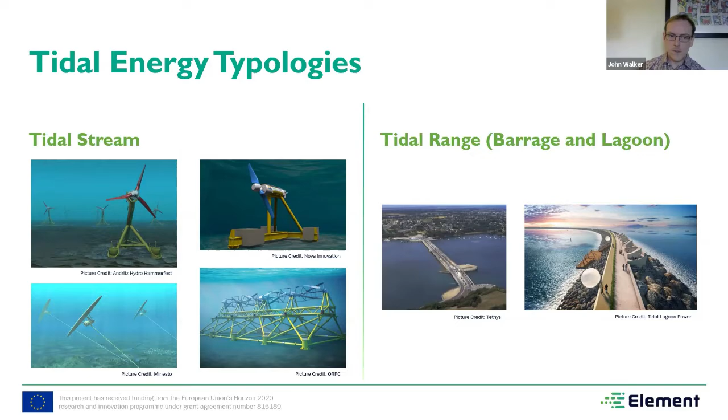Okay, so technology readiness. So the technology is now crossing a boundary from demonstration projects into commercial tidal arrays. In the last decade or so, there's been significant progress with notable advances in the technology. Devices are now being deployed into the harsh marine environment with a good degree of confidence in their expected performance, and with the benefit of sustained periods of operation at sea, both in terms of the data and the information that's being collected, operations and maintenance understanding, and also proving that they can survive this environment. And the technology has now also been proven to be able to deliver consistently into the grid.

Industry pioneers have successfully funded and deployed first arrays such as the Nova Innovation Bluemull Sound Array in Shetland, the world's first fully operational grid-connected tidal array, which we'll be hearing more about this afternoon, and also the MeyGen project in the Pentland Firth, the world's largest tidal array at the moment. And we've also seen production milestones such as Orbital Marine Power's 2 megawatt device, the world's most powerful tidal turbine.

To continue this exceptional progress, we need to continue increasing performance and reducing costs, and this is where the Element project comes in, making use of advanced control methods. The UK and Europe are well placed at the forefront of the technology development, with a variety of active developers, a strong supply chain, and unrivaled test centres and demonstration zones.

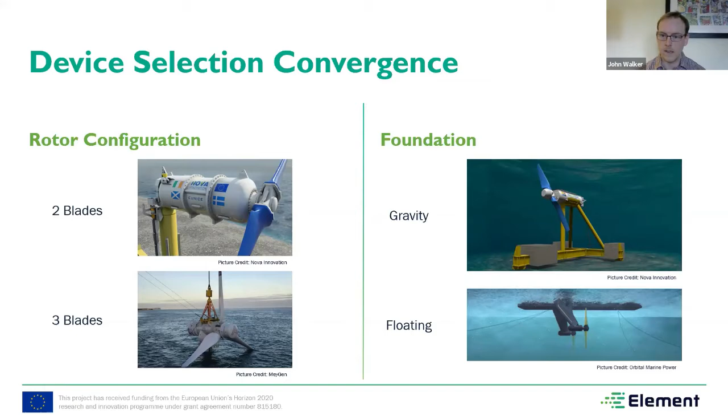And just to complete this introduction section, ORE Catapult and Nova Innovation have been successfully collaborating as project partners for a number of years now, particularly on the EnFAIT, which is Enabling Future Arrays in Tidal project, D2T2 project, and now Element. We've covered quite a wide range of work with them, which covers project communications and dissemination, marine offshore operations, and then also looking at the Shetland array resource and wake modelling, which required ADCP and ADV deployments, turbine load monitoring and instrumentation. And as part of the D2T2 project, we've previously tested a turbine at our facility in Blyth.

Okay, and that's a good point to hand over to Colin Walker, who will now describe the role of the Shetland tidal array in the project.

Thanks, John. Yes, I'll just share a quick introduction to Nova Innovation and where we're at in our technology development to help provide a context for the role that Element has for us as a company. We have our head office and manufacturing facility here in Edinburgh in Scotland, but we also have colleagues spread out in Shetland, Wales, and most recently Canada.

We just celebrated our 10th birthday as a company last month, and in those years we have been continuously developing our tidal turbine technology. We started with a 30 kilowatt prototype device and then designed, built and deployed 3 of our 100 kilowatt M100 devices in what became the world's first offshore tidal array at our Bluemull Sound site in Shetland.

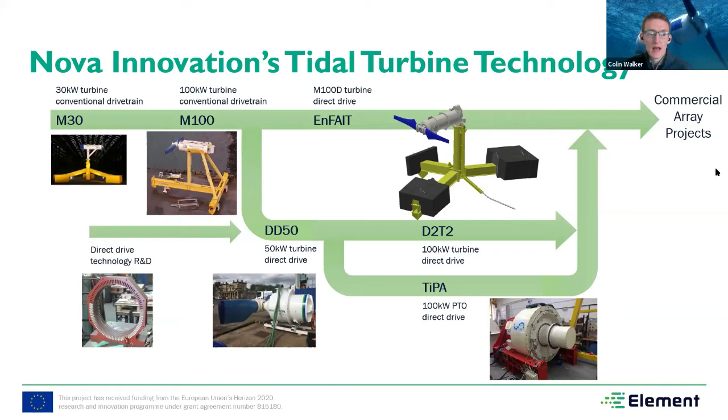As well as the technology within the turbine itself, we've developed other aspects of technology associated with tidal energy for ultimately delivering renewable energy to the grid. One such project was our energy storage project in partnership with Tesla, where despite the variable power production from the tides, we are now able to provide a constant base load delivery of power to the Shetland grid from our turbines using battery storage and our in-house developed automated power dispatch controller.

So we're not just developing the turbine hardware itself, but at Nova we have a holistic approach to making tidal power a practicable and competitive option for renewable electricity production. For example, we've also got a live project developing right now, an improved subsea electrical connector for marine renewable energy devices. So all these different aspects come together with the turbine itself.

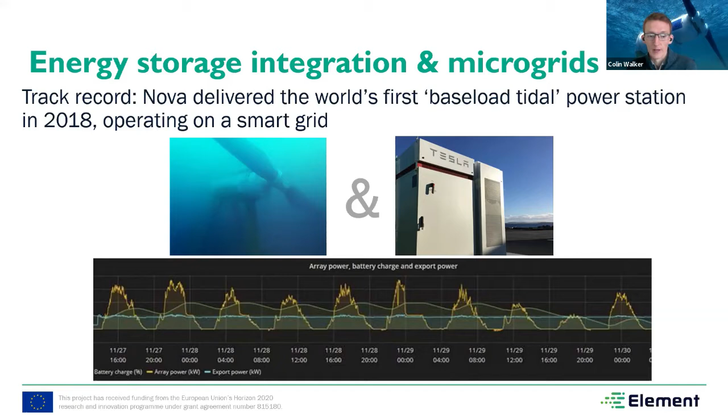Next slide, please. Having said that, the turbine itself has always remained the central focus for our technological advancements. And ultimately, this is what makes the money. It must be demonstrated to perform reliably and survive the harsh marine conditions of high flow energetic sites.

There should be a few pictures of that, Audrey. I'm not sure if it's going to be on another click.

But after learning many lessons, yeah, thanks, from these, the 3 projects represented on the screen there, we believe that our current hardware design is capable of what we require from it. It's in a good place and it's been matured over several years. We've also been developing the turbine control system in each of these projects, but Element gives us a unique opportunity to advance the maturity of our control system at a faster rate.

Taking the progress that we've made in our hardware development, we can now make advancements in our control systems to ultimately get more out of what we already have. And I'll talk more about that later and how Element does that for us. Okay, I'll now pass over to Dr. Hong Yue.

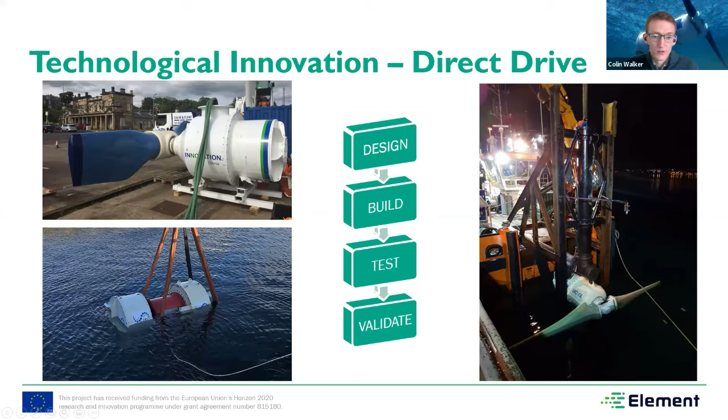Thank you, Colin. I'm Hong from the University of Strathclyde. As I mentioned earlier, we are involved in the Element project, mainly looking after behavior modeling. Strathclyde University has been awarded University of the Year twice, and also this year we've been awarded Scottish University of the Year and the Queen's Anniversary Prize.

For this project, mainly 2 departments are involved. We have colleagues from the Department of Electronic and Electrical Engineering, that's EEE. And we also have colleagues from the Department of Naval Architecture, Ocean and Marine Engineering, NAOME in short. So these 2 teams together bring the UK's largest cluster of researchers in offshore renewable energy. Next slide, please.

So first, I start to introduce my research center, the Wind Energy and Control Center in the EEE department. This is a research group focusing on renewable energy and also control. So we do teaching and research in various fields, mostly in wind, but also in other renewable types. For example, the dynamic analysis of turbine systems, modeling, simulation, control system design and optimizations, etc. And also we look at resource assessment, condition monitoring, etc. And there are other areas like a wider covering of complex and nonlinear systems.

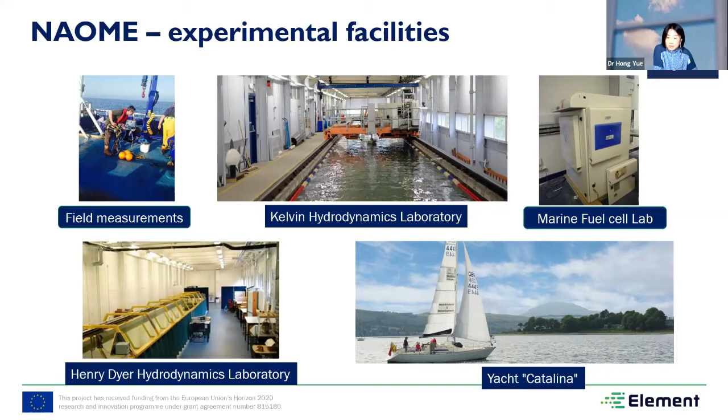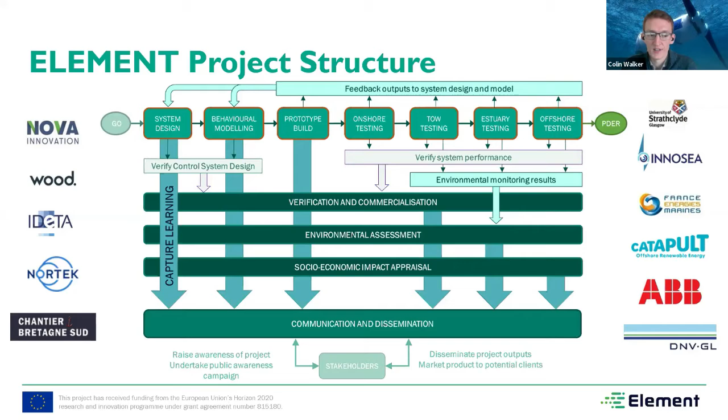You go to the next slide, please. I think you might need to click again. My PowerPoint skills let me down there.

One of the main unique aspects of Element is the fact that we aren't having to invest significant capital to make improvements in the control system. So at the moment, most of our turbine cost is associated with the turbine structure, the drivetrain components, etc. Basically all of the hardware that we have to put in the sea. But once we've developed a control system, there isn't much marginal cost involved for changing one control system out for another. And that's because these changes are predominantly software based.

Maybe sometimes we'll require some new sensors or minor hardware changes, but most of the changes are in the software, and as a result don't bring with them an additional capex cost, and therefore our existing turbine design remains at the same cost even with these improvements added in.

The other unique aspect of the project is that we aren't starting from scratch in this area of control system improvement. The wind industry has been here long before us and to a lot of extent continues still to work in this area, but the Element project is looking to bring the experience that our project partners have from that industry, and also bring the knowledge over from wind industry control to tidal turbine control.

Ultimately, the principles and concepts of control are common between the two applications. But where Element adds value is that by transferring these learnings from the wind industry and then tailoring them to meet the nuances that tidal presents, we can make the most of those learnings that wind has already made before us. Go to the next slide, please.

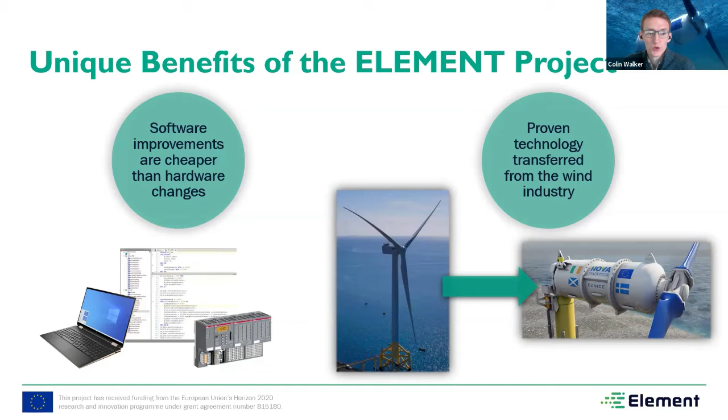So what do we mean when we mention the turbine control system? Well, it is quite a broad term, but basically it covers anything within the turbine that's involved in controlling operation of the turbine. If you focus in a little bit to the fundamental operation of a turbine, it's to deliver power to onshore by controlling aspects such as the speed and torque and power of the turbine. And this fundamental aspect of controlling the speed and torque and power, we call the turbine controller. And it's particularly complex, and it's a specific area of focus for the Element project.

All of this decision making has to happen constantly and at a very fast rate. If you think of traditional thermal power stations, you've got the opportunity to throttle or control the fuel, whether it be coal or gas or whatever, or even in hydropower, controlling the water flow. You have control of that into your system. And so when you want to power down, you can throttle that fuel supply back. But like wind, in tide, when we're working with nature, we don't get to control what we're presented with, and we can't control the tidal flow.

So this effectively means that the turbine is flying blind. It doesn't know what's going to come up next. And so therefore it has to constantly be reacting to the power produced by the turbine rotor as it spins. To put it another way, between the time of me clicking my fingers, our turbine in Shetland will have calculated and changed the speed and torque of our turbines over 20 times between each click. And so what is a very fast decision requires very accurate information and intelligence to make the right decision. And so this is where the complexity arrives.

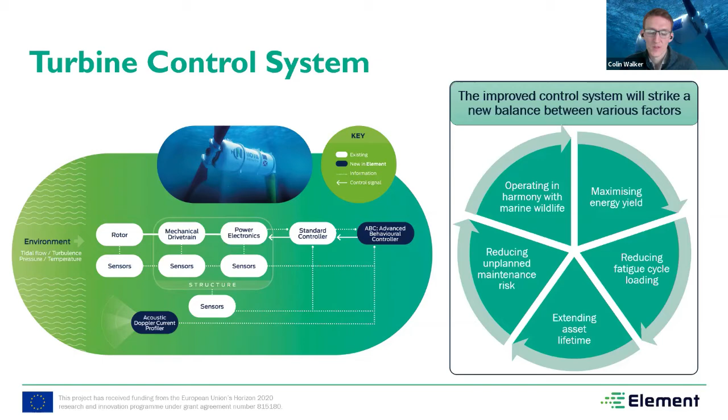That just outlines some of the tangible objectives for the project. These are specific targets within the project that ultimately all result in a reduced levelized cost of energy. That's the main measuring rod, if you haven't heard that term before, for where the industry and technology are at.

That LCOE reduction that we're aiming for, that 17% reduction, is made up by a modest improvement in energy yield, that's electricity produced, a reduction in OPEX through improved reliability, particularly around the area of reducing variations in loads that the turbine experiences, and therefore reducing fatigue loading of the turbine structural components, which also contributes to a lifetime extension, where we also want to increase the lifetime of the turbine by improved management of the turbine as it ages.

In other words, the same way as you drive a 15-year-old car a bit differently from a brand new car, it's that kind of approach that we're wanting to build into our control system. And ultimately that can produce a reduction in LCOE.

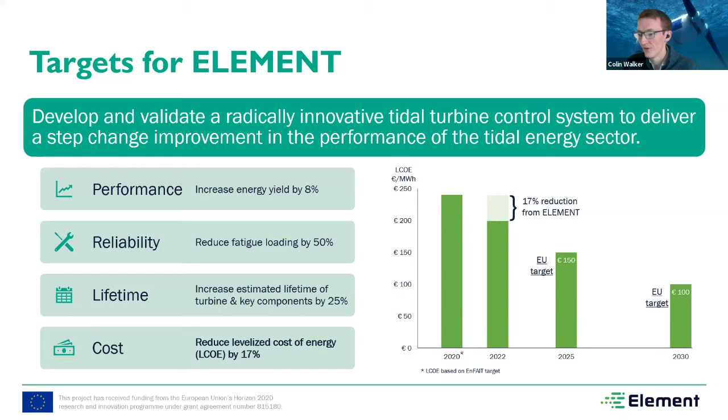Colin has mentioned the control challenges for the tidal turbine systems. And as you can see, there are various factors to be considered for the turbine system. And then how do we balance all these important factors in the same system? One option is to establish a holistic numerical model that includes the different subsystems into the system.

And we are hoping that such a behavior model can be used to test and tune the control systems over a wide range, covering the different turbine sizes and the different supporting systems to the turbine system. And also we wish to see the performance in different testing sites, say onshore testing, tow testing, estuary testing, offshore testing, etc.

And then I need to echo Colin and John that the tidal turbine system operates in a very harsh and also uncertain environment. So if we hope to improve the control system performance for such a system under a highly uncertain environment, we need to take into account data information. And the data information can come from new measurement technologies and also from new estimation techniques.

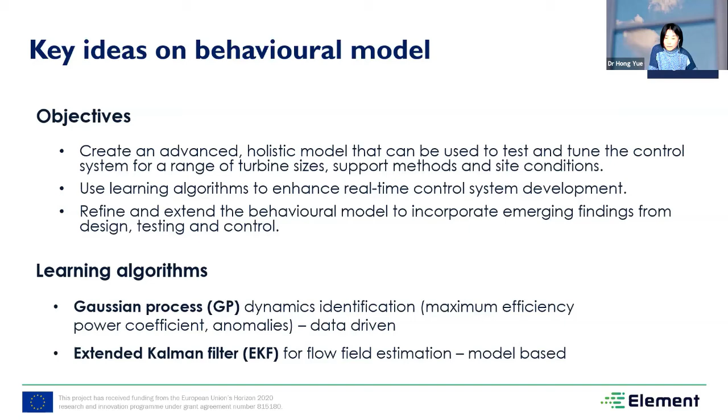Okay, right. This is a configuration of the behavior model system. I'm putting here a very simplified version, mainly to give you a flavor of what is included in this behavior modeling system. So if you look at this configuration figure, in the central part of the system, those dark blue blocks are developed in the first stage, as we call initial behavior modeling. And in the very central part of this modeling system is the turbine model itself.

And the turbine model takes input from the far-field hydrodynamics part, and also, in the first stage, a simplified structure supporting model. And this information can provide the simulated measurement data that can be used for the controller design. And the controller, of course, will give guidance or instructions to the turbine system for the operation.

And then for this system, the core turbine model can produce output that is used for calculation of the energy generation, and also to evaluate the loading performance to be used for the damage model.

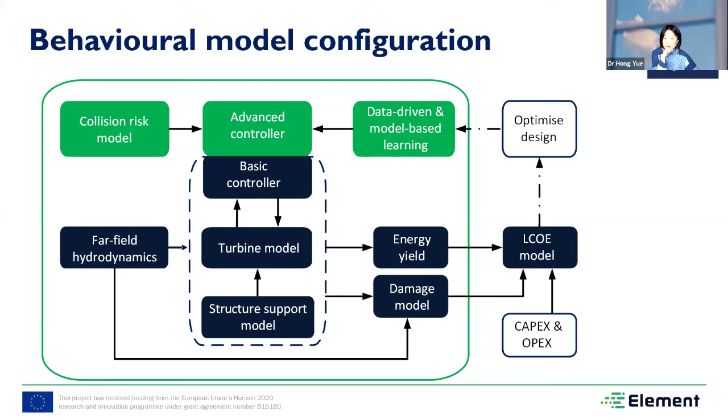For the Element project, we have different work packages for control and also for behavior modeling. They are closely linked together, and the control target itself, we can put the control at different levels. For example, at the supervisory control level, and also at the operational control level. I just put one recent slide here to show a part of the supervisory control.

And in this case, for the tidal turbine system, if we look at the start and stop operation at the supervisory level, a reasonable logic is to put it into several stages, including 2 startup stages, 2 shutdown stages, and 2 park stages at high and low flow speed, and 1 shared normal stage

in between. To design a proper control logic to support the startup and stop of the tidal turbine system, in principle, we need to estimate the flow and make decisions based on reliable estimation of the flow information. And these can be supported by various techniques.

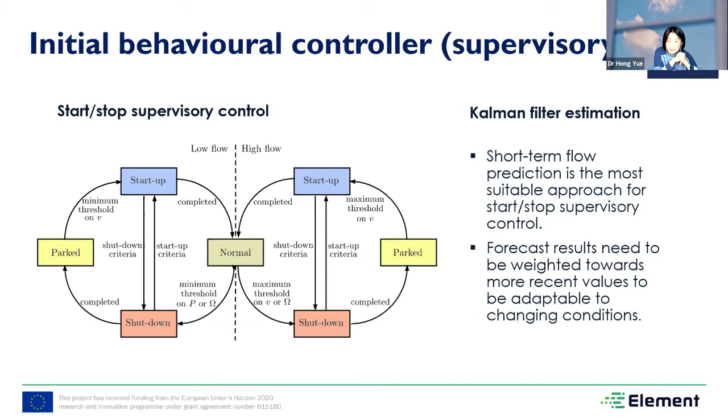One of them, which is highly regarded in the wind industry, is to use a Kalman filter to estimate the flow information in the short term. So that is going to be investigated in this project. Yeah, thanks, Hong.

So ORE Catapult will be delivering the onshore testing work package at our test facilities in Blyth, and this is scheduled for April and May 2021, so next year. So the key benefits of including the onshore testing in the programme are being able to perform a performance appraisal under very controllable test conditions. This helps to de-risk the future offshore operations in the following work packages.

And you can imagine it's a lot easier to address any issues and findings onshore than once you've deployed offshore. Also with testing, you've got the ability to cover a very wide test matrix, and you can control the point of your test, like Colin alluded to earlier. Tidal flows are very variable. During your testing onshore, you get out what you put into your test rig.

And that will give the opportunity to adjust or optimize the test controller before going on into work packages 9, 10 and onwards. The test results from the onshore testing will be independently verified prior to that, and the findings will be invaluable for informing that future work.

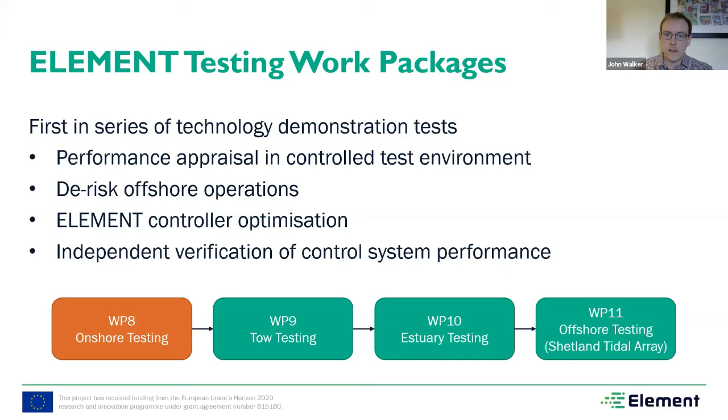Okay, so just a very quick background to our test capability at ORE Catapult. So we operate the most comprehensive, open access and independent test and research facility anywhere in the world for offshore renewables. And we use our expertise to help develop the next generation of these technologies.

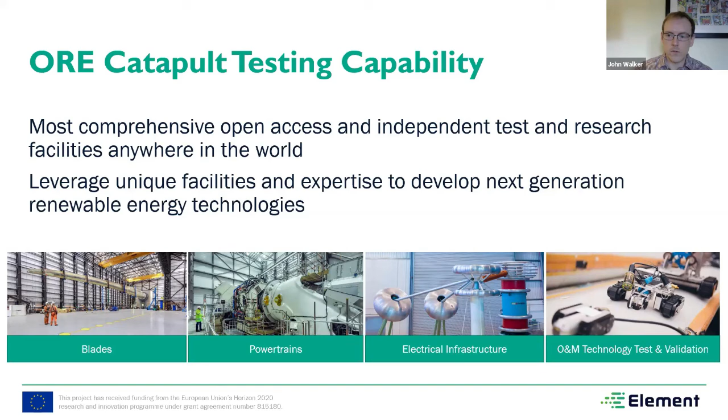And these test and validation activities fall under 4 key areas. So blades, powertrains, electrical infrastructure, and operations and maintenance technology test and validation. So the area that we'll be looking at for Element is powertrain testing.

So the 1 MW Powertrain Test Rig is being developed to test and support the development of sub-megawatt, so below 1 MW, systems and sub-components. And these tests typically include endurance and extreme load, system performance tests, and system verification and validation, and also improvements to the physical and numerical models, such as condition monitoring validation.

Got a full suite of instrumentation, including torque and speed measurements, which are used for the controller feedback, and everything's output through to a 50 Hz 400 volt distribution board. And obviously it's all controlled by SCADA systems. That's for the data acquisition and the control, and that all includes the essential safety protocols for the test.

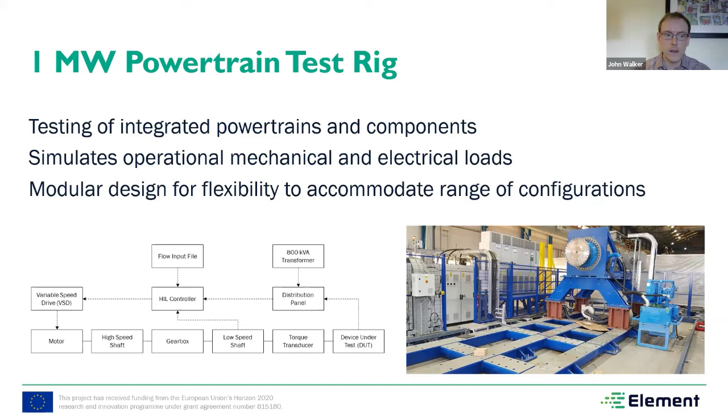And so on the next slide, we've got a brief description. So a new feature being implemented specifically for the Element project is the ability to conduct hardware in the loop tests. So hardware in the loop is a technique where signals from the controller are connected to the test system to simulate reality.

So in this case, the rotor from the turbine is removed, and the HIL controller provides a signal which represents what the rotor would do, and the Element control system is tricked into believing that the rotor is installed. This allows the shaft speed or torque to be controlled under time varying tidal flow conditions.

We've got a flow model which is used to determine the turbine behaviour in different tidal flows, and this will include the effects of flow shear and turbulence and such like. Following commissioning, we'll do a series of baseline performance tests, and that will then be followed by the Element hardware in the loop control system tests. And this will allow an assessment of the performance to be made and to show what improvement we're getting from the Element control on board.

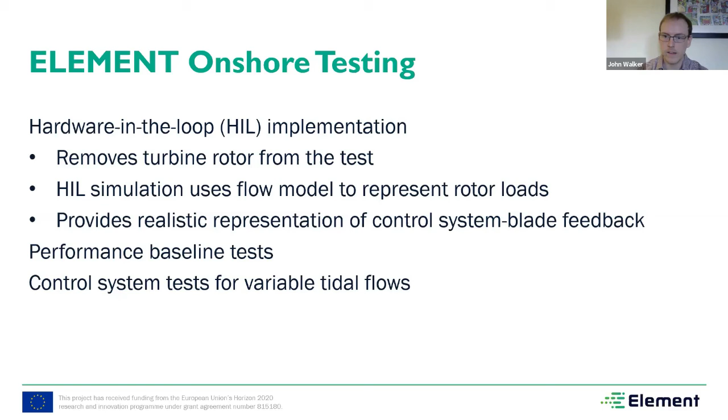And this is a fairly unique test asset, and the onshore test program will help play a role in accelerating the development of the innovative technologies that we're looking at in the Element project. And that will help to harness the clean, abundant and predictable tidal energy flows that we see around Europe.